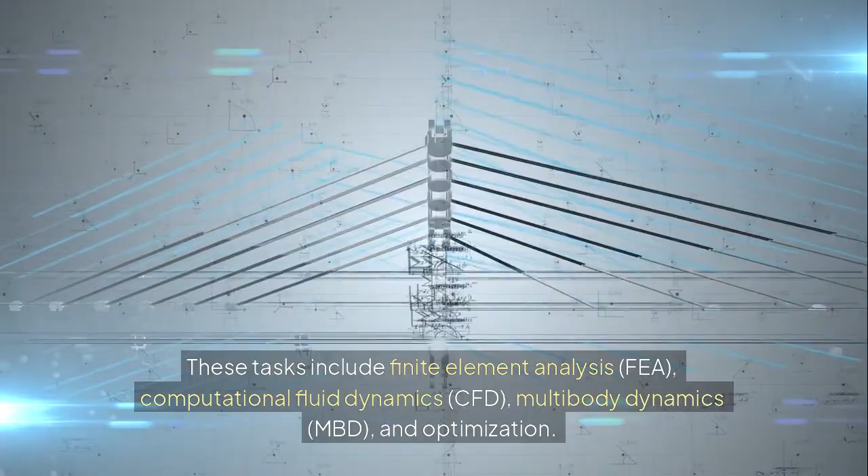Computer-aided engineering, CAE, or engineering informatics is a broad domain encompassing the use of computer software to aid in engineering analysis tasks. These tasks include finite element analysis, FEA, computational fluid dynamics, CFD, multibody dynamics, MBD, and optimization. CAE tools are integral in the engineering product development lifecycle, supporting design validation, simulation, and decision-making processes. With the advent of powerful computational resources and advanced numerical methods, CAE has evolved into a cornerstone technology in modern engineering disciplines including automotive, aerospace, civil, mechanical, and biomedical engineering.

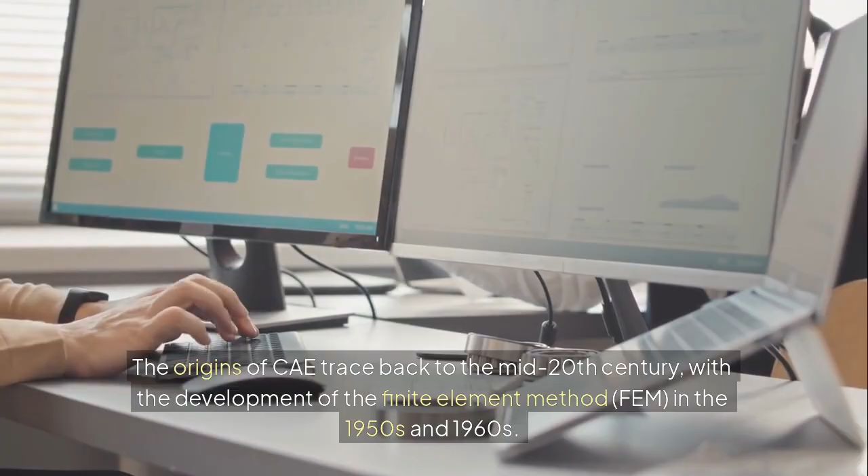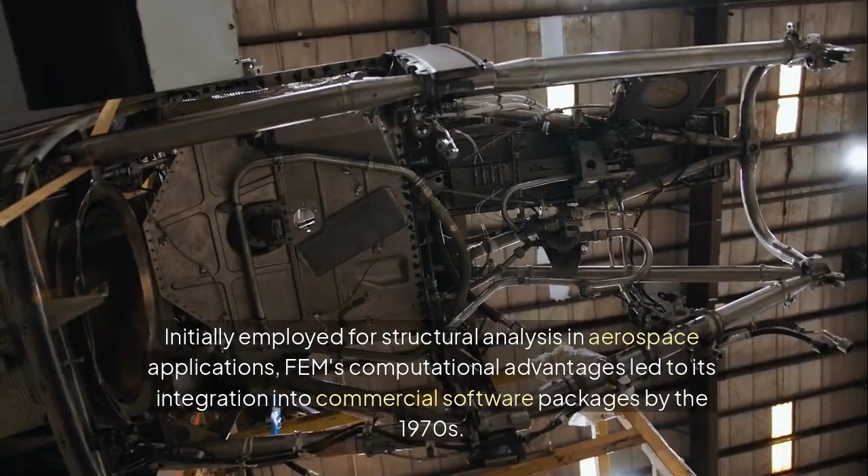Historical evolution of CAE. The origins of CAE trace back to the mid-20th century, with the development of the finite element method, FEM, in the 1950s and 1960s. Initially employed for structural analysis in aerospace applications, FEM's computational advantages led to its integration into commercial software packages by the 1970s.

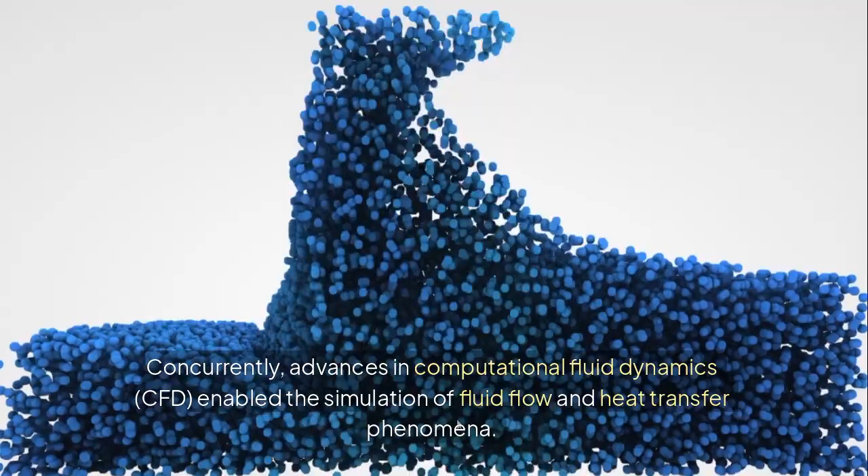Concurrently, advances in computational fluid dynamics, CFD, enabled the simulation of fluid flow and heat transfer phenomena. The 1980s and 1990s saw the proliferation of CAE tools as hardware became more affordable and software more user-friendly, culminating in integrated CAE suites that allowed for multi-physics simulations by the early 2000s.

Fundamental principles of CFD as computer-aided engineering. Computational fluid dynamics, CFD, is a critical sub-discipline within the broader field of computer-aided engineering, CAE, concerned with the numerical analysis of fluid flows and associated phenomena. Through the solution of governing partial differential equations, CFD enables engineers and scientists to simulate the behavior of fluids in complex geometries under diverse conditions.

In the context of CAE, CFD provides a virtual environment for evaluating and optimizing fluid dynamics performance, significantly reducing the need for physical prototypes and experimental testing. It plays an indispensable role in industries ranging from aerospace and automotive to biomedical and energy systems.

CFD is founded on the numerical solution of the Navier-Stokes equations, which describe the conservation of mass, momentum, and energy in a fluid medium. These equations are non-linear and coupled, often requiring sophisticated discretization and solution techniques to achieve stable and accurate results.

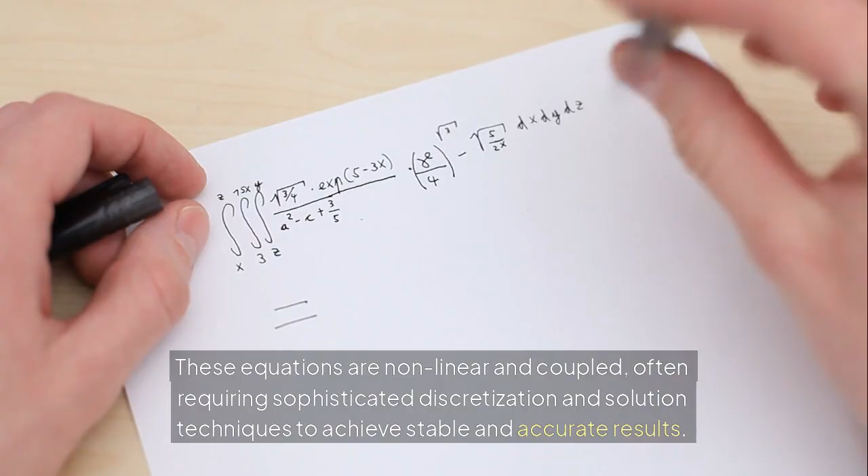The core principles include: 1. Governing equations: continuity equation for mass conservation, momentum equation from Newton's second law, and energy equation from the first law of thermodynamics.

2. Turbulence modeling: direct numerical simulation, DNS; large eddy simulation, LES; and Reynolds-averaged Navier-Stokes, RANS, models, including K-epsilon, K-omega, and SST.

3. Discretization methods: finite volume method, FVM; finite difference method, FDM; and finite element method, FEM. Each discretization method translates continuous equations into algebraic forms solvable on a computational mesh.

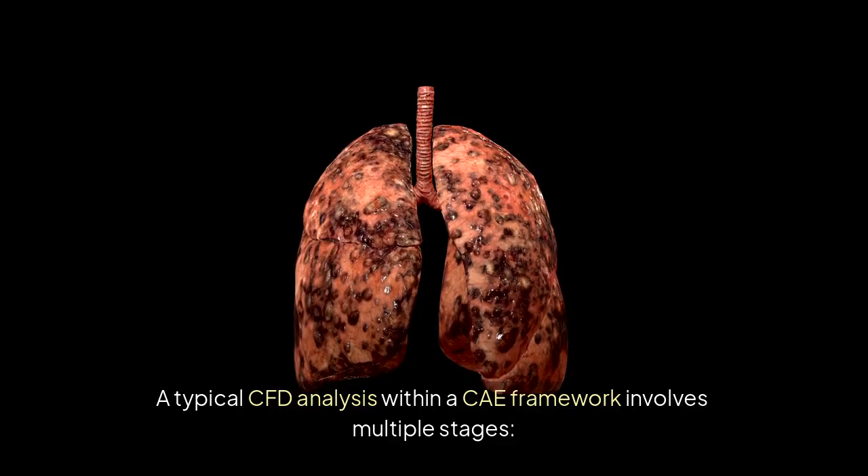The CFD workflow in CAE. A typical CFD analysis within a CAE framework involves multiple stages. 1. Pre-processing: this stage includes geometry creation or import, usually from CAD models, domain discretization, meshing, and specification of boundary and initial conditions. The quality of the mesh is paramount, as it affects both solution accuracy and computational efficiency.

2. Solver execution: during the solving phase, the discretized equations are computed iteratively using numerical solvers. Convergence criteria, under-relaxation factors, and time-stepping schemes are crucial parameters. Depending on the problem, steady-state or transient simulations may be employed.

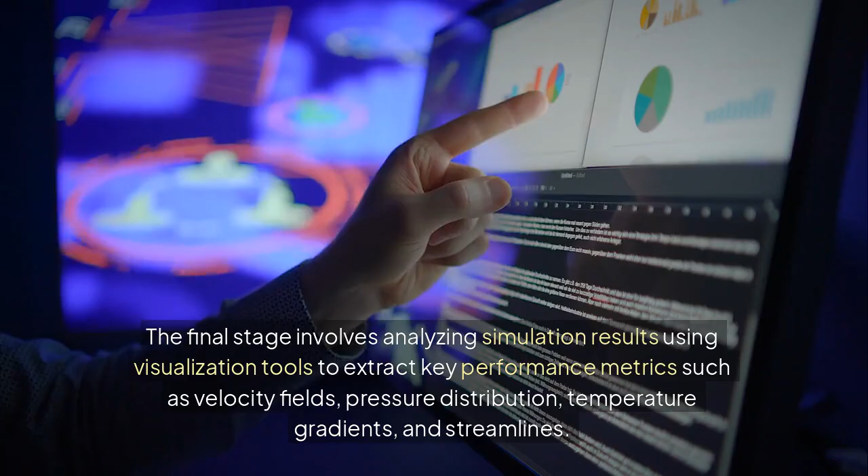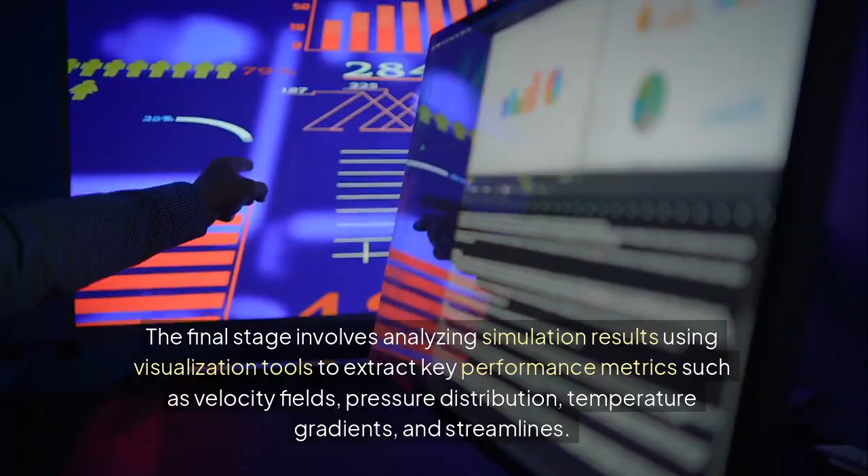3. Post-processing: the final stage involves analyzing simulation results using visualization tools to extract key performance metrics such as velocity fields, pressure distribution, temperature gradients, and streamlines. Software like ParaView, TecPlot, and ANSYS Fluent's built-in tools support advanced data analysis.

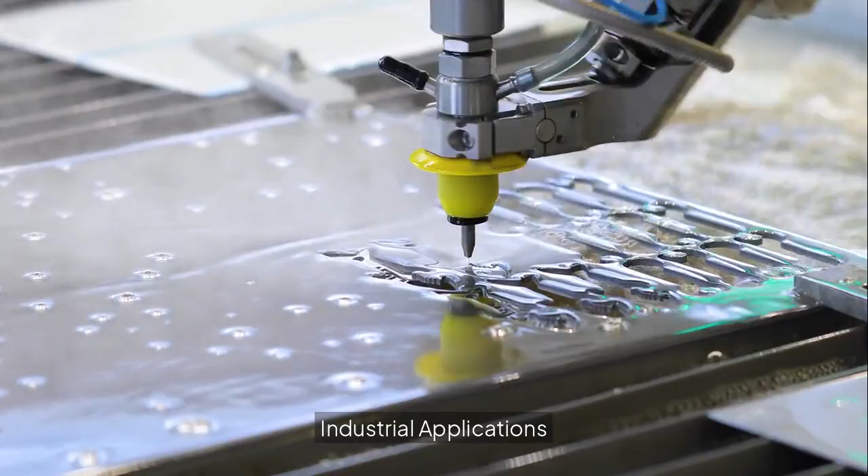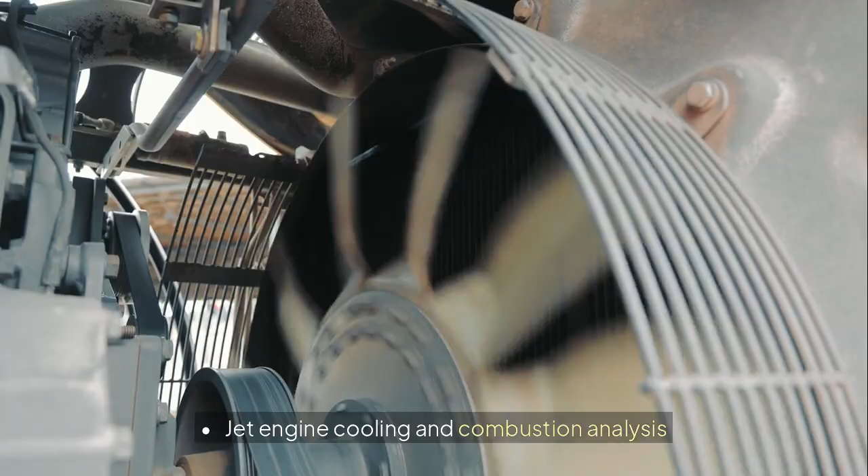Industrial applications. CFD has transformative impacts across various sectors. In aerospace engineering: airflow over aircraft wings and aerodynamics, jet engine cooling and combustion analysis, and flow-induced noise and vibration prediction.

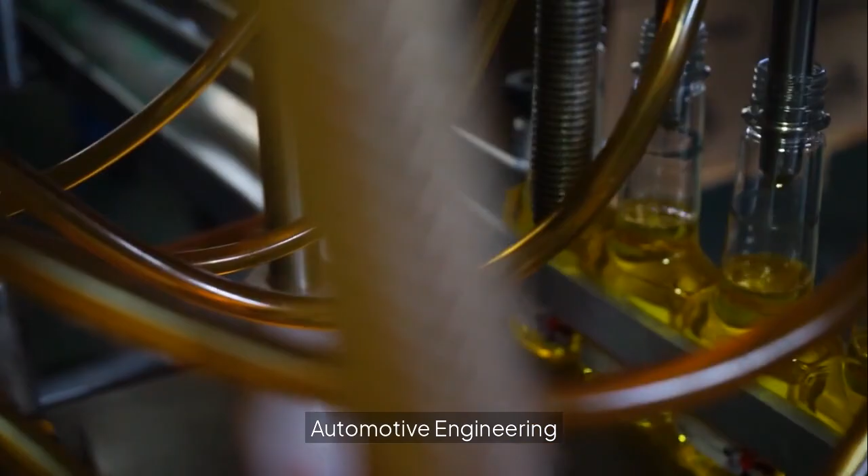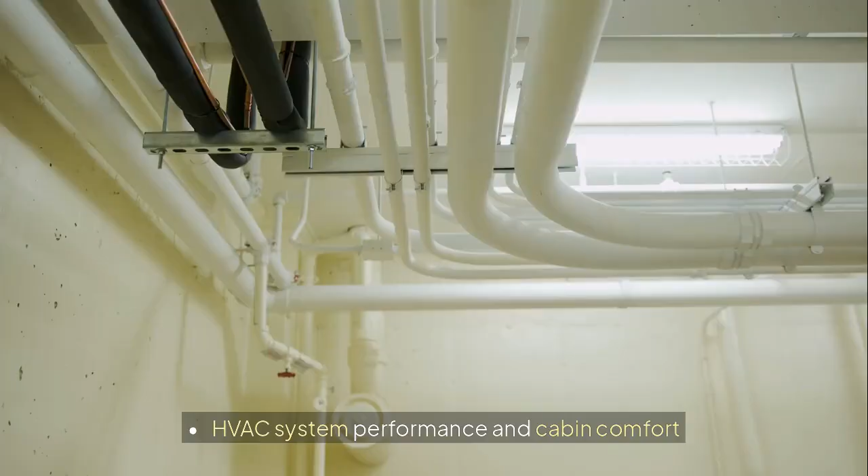Automotive engineering: external aerodynamics and drag reduction, internal combustion engine simulation, and HVAC system performance and cabin comfort.

Civil and environmental engineering: wind load analysis on structures, urban airflow modeling and pollution dispersion, and hydraulics of water distribution systems.

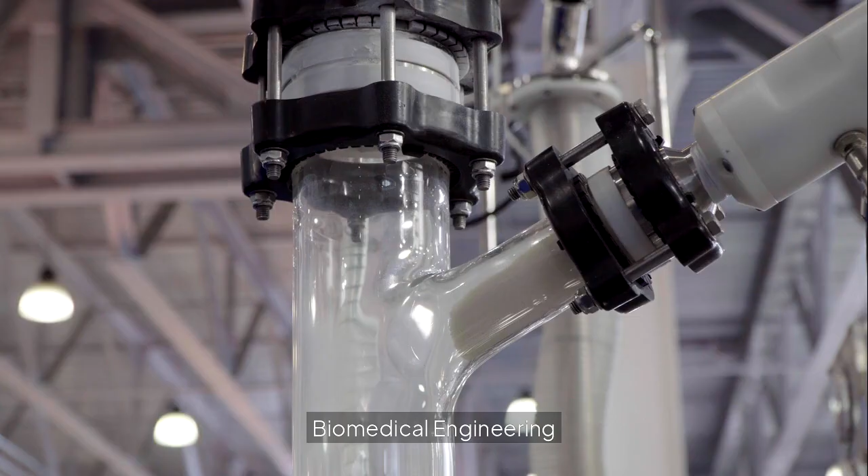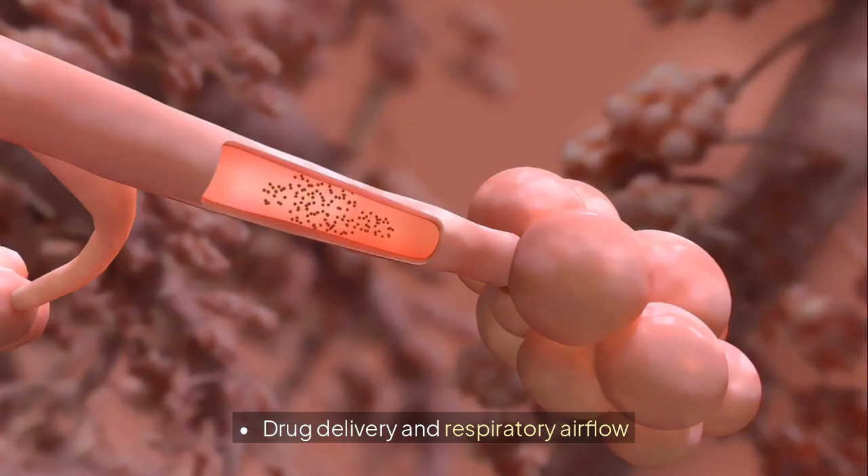Biomedical engineering: blood flow in arteries and heart valves, drug delivery and respiratory airflow, and microfluidic device simulation.

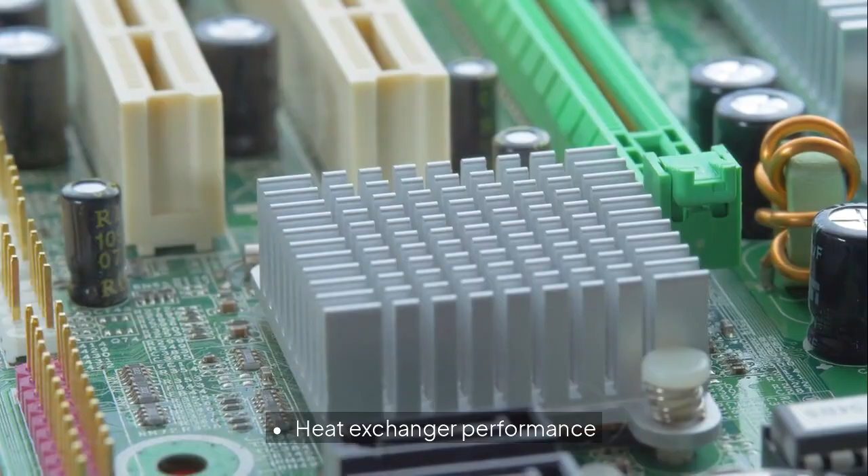Energy and power systems: combustion dynamics in gas turbines, heat exchanger performance, and renewable energy systems such as wind turbines and solar thermal collectors.

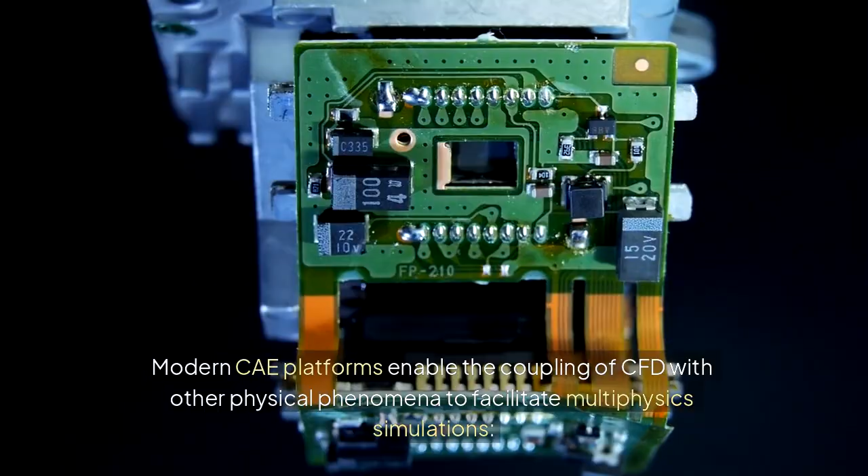Integration with multiphysics and optimization. Modern CAE platforms enable the coupling of CFD with other physical phenomena to facilitate multiphysics simulation.

CFD structural, FSI, fluid structure interaction analyses allow for the study of deformation in response to fluid forces, e.g., aeroelasticity in wings.

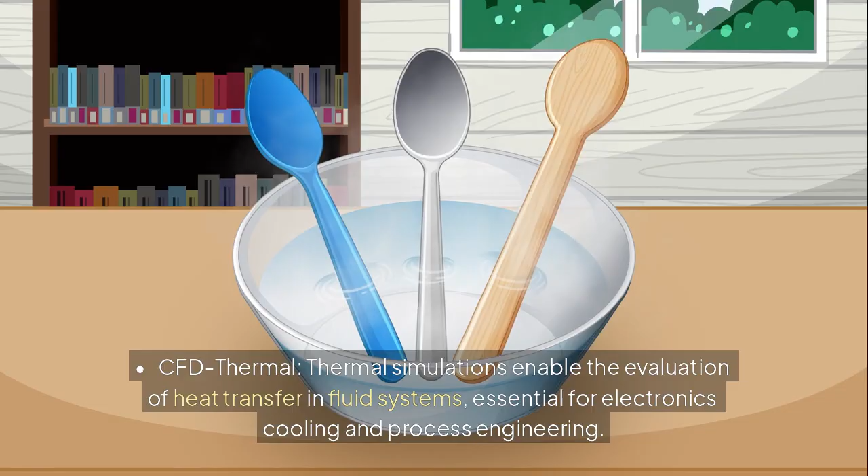CFD thermal. Thermal simulations enable the evaluation of heat transfer in fluid systems, essential for electronics cooling and process engineering.

CFD chemical reaction. Combustion and reactive flows require coupling with chemical kinetics for accurate modeling.

Additionally, optimization algorithms, e.g., genetic algorithms, adjoint methods, and gradient-based approaches, are increasingly integrated with CFD tools to automate design exploration, enhancing product performance and efficiency.

Numerical challenges and solution strategies. CFD presents several technical challenges that demand robust methodologies.

1. Turbulence modeling. The need for accurate yet computationally feasible turbulence models necessitates careful model selection based on Reynolds number and flow characteristics.

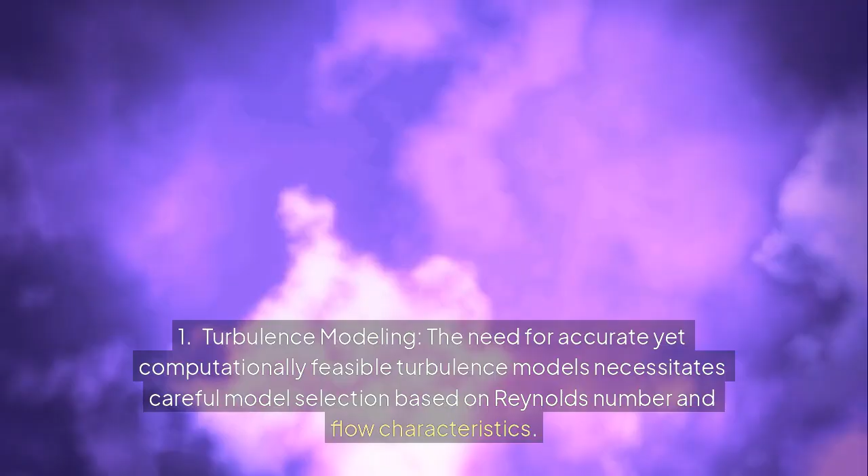2. Mesh quality and adaptivity. Structured versus unstructured meshing, boundary layer resolution, and adaptive mesh refinement, AMR, are crucial for capturing critical flow features.

3. Convergence and stability. Numerical instabilities can arise from improper discretization or boundary condition specification. Time step selection and solver settings play a vital role in ensuring convergence.

4. High-performance computing, HPC. Large-scale CFD simulations benefit from parallel computing, requiring efficient solver scaling and memory management.

Emerging trends in CFD. As computational power grows and software becomes more advanced, CFD continues to evolve in exciting directions.

1. AI and machine learning. Surrogate modeling for rapid design evaluation. Data-driven turbulence modeling. Intelligent meshing and adaptive simulation control.

2. Cloud-based simulation. Democratization of CFD tools through SaaS platforms. Scalable simulation environments for SMEs. Collaborative, real-time simulation workflows.

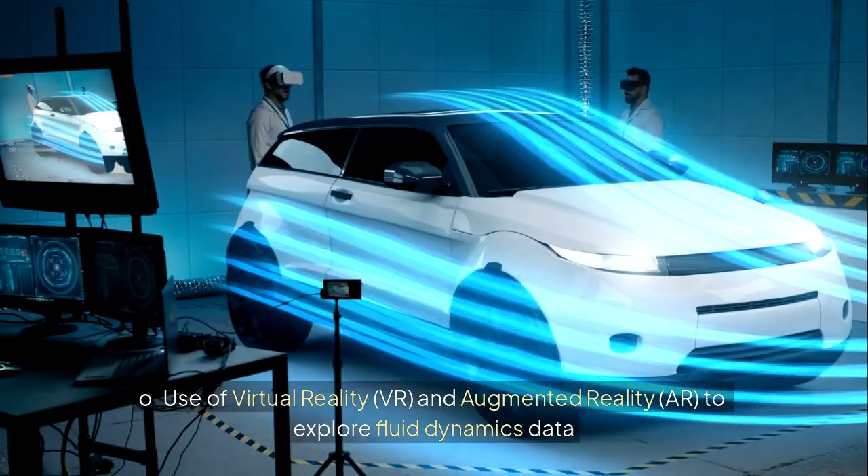4. Immersive visualization. Use of virtual reality, VR, and augmented reality, AR, to explore fluid dynamics data. Enhanced design communication and stakeholder engagement.

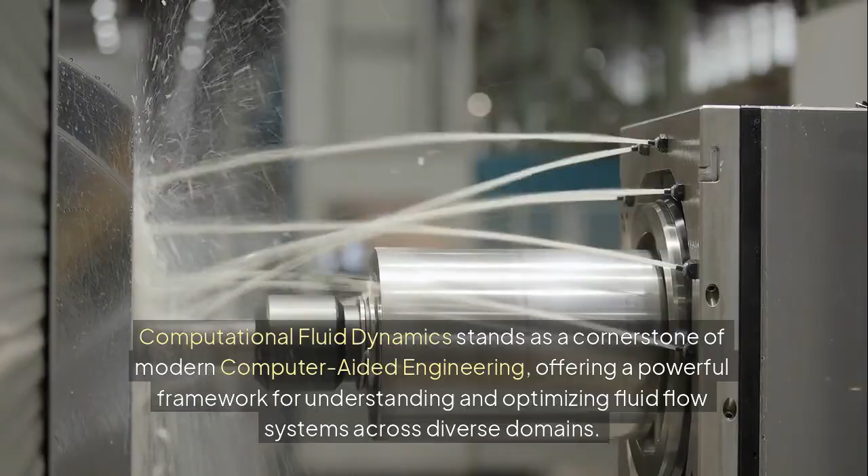Computational fluid dynamics stands as a cornerstone of modern computer-aided engineering, offering a powerful framework for understanding and optimizing fluid flow systems across diverse domains.

Through sophisticated numerical methods and integrated CAE platforms, CFD facilitates a paradigm shift from experimental to virtual testing, accelerating innovation and reducing time to market.

The continuous integration of AI, cloud computing, and real-time simulation into CFD tools promises to further expand its capabilities, making it an indispensable asset in the digital engineering toolkit.

Technological foundations of CFD as computer-aided engineering, CAE.

Computational Fluid Dynamics, CFD, is a vital field within computer-aided engineering, CAE, that focuses on the numerical simulation of fluid flow and heat transfer. By leveraging mathematical models, numerical algorithms, and high-performance computing, CFD empowers engineers to design and analyze systems where fluid motion is a key factor.

The increasing complexity of engineering systems and the demand for optimization in performance, cost, and sustainability have made CFD an indispensable tool across multiple industries. This essay provides an in-depth exploration of the technological foundations, numerical algorithms, programming paradigms, and engineering applications of CFD within the CAE domain.

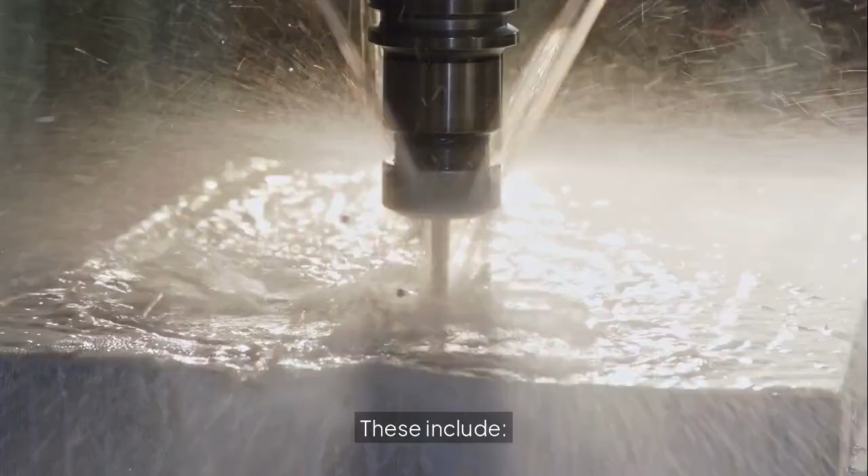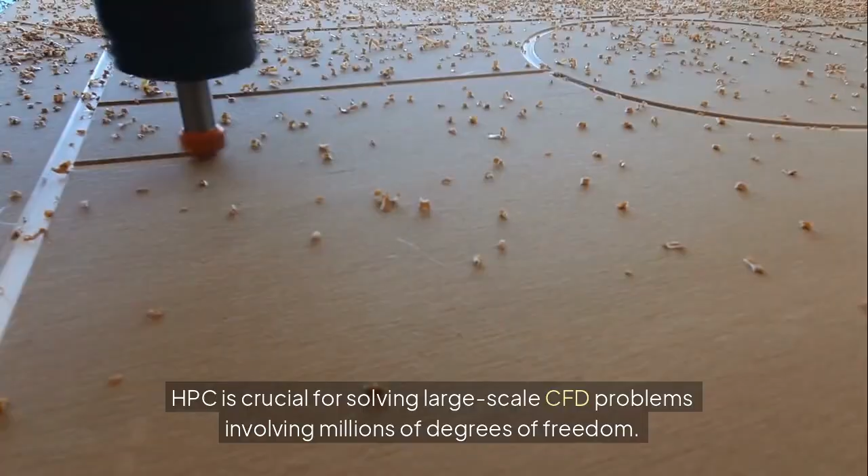High-performance computing, HPC. HPC is crucial for solving large-scale CFD problems involving millions of degrees of freedom. Parallel computing architectures, distributed memory systems, and GPU acceleration significantly enhance the computational efficiency of CFD solvers.

Mesh generation and adaptive grid. Mesh generation converts a physical geometry into a discretized computational domain. Structured, unstructured, and hybrid meshes are used depending on the complexity of the geometry and the desired resolution. Adaptive mesh refinement, AMR, techniques dynamically refine the mesh based on solution gradients, ensuring high accuracy without excessive computational cost.

Visualization and post-processing tools. Advanced visualization software, e.g., ParaView, Tecplot, FieldView, facilitates the interpretation of large CFD datasets. These tools support contour plots, vector fields, streamlines, and isosurfaces, enabling engineers to assess flow patterns, identify anomalies, and make informed decisions.

Numerical algorithms in CFD. The core of any CFD simulation is the numerical solution of the Navier-Stokes equations, which govern fluid motion. These equations are typically discretized using various algorithms.

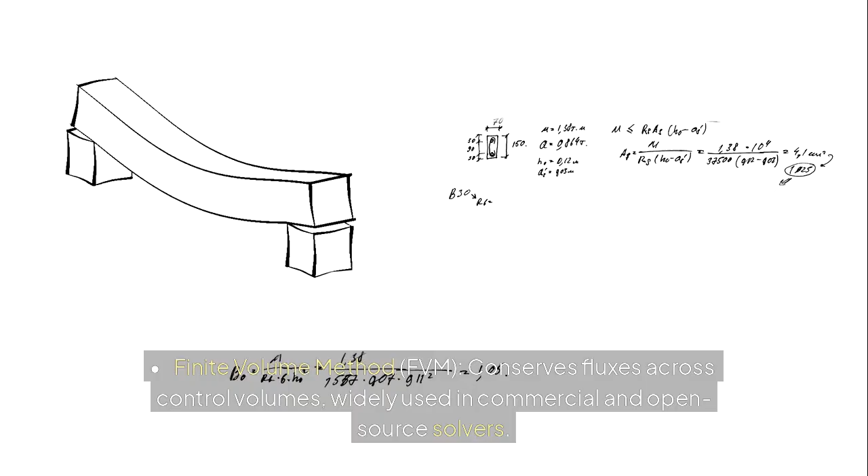Discretization techniques. Finite volume method, FVM, conserves fluxes across control volumes, widely used in commercial and open-source solvers. Finite element method, FEM, offers flexibility for complex geometries and higher-order accuracy. Finite difference method, FDM, simpler to implement, suitable for structured grids and educational use.

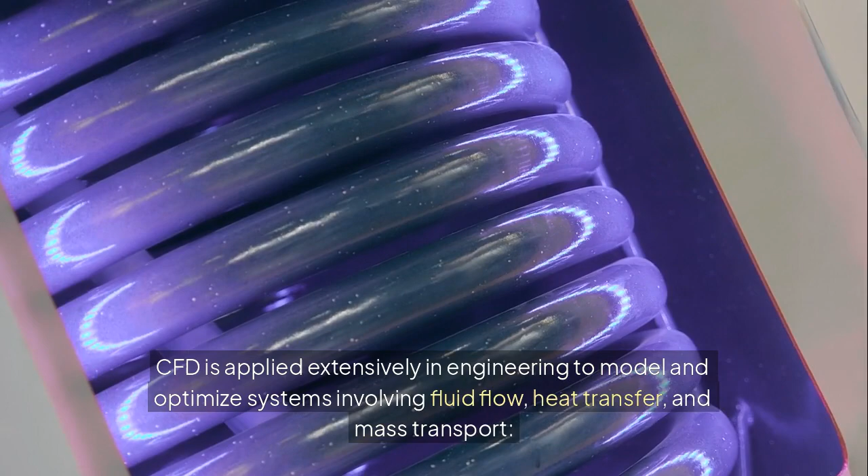Engineering applications of CFD. CFD is applied extensively in engineering to model and optimize systems involving fluid flow, heat transfer, and mass transport.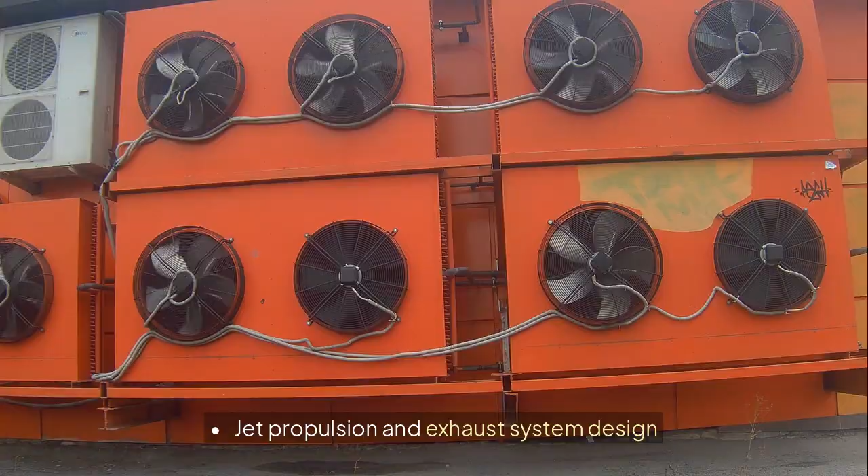Aerospace engineering: aerodynamic analysis of aircraft and spacecraft, jet propulsion and exhaust system design, and thermal control in high-speed vehicles.

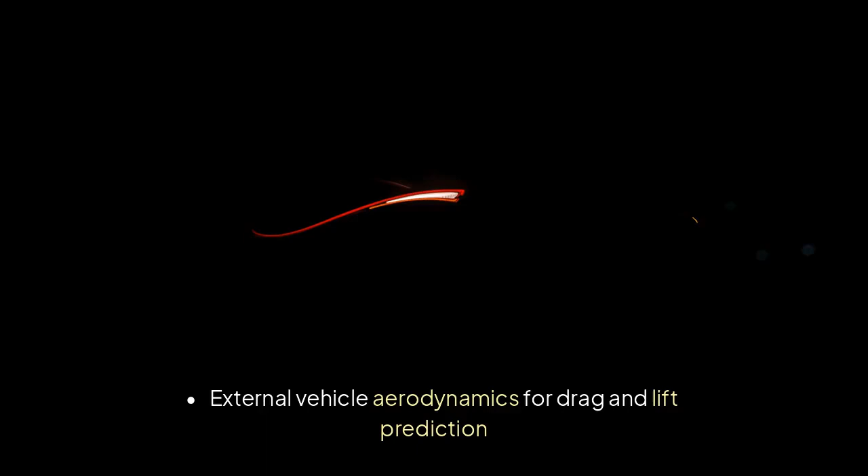Automotive engineering: external vehicle aerodynamics for drag and lift prediction, engine combustion analysis and emission reduction, and cooling system optimization for engines and batteries.

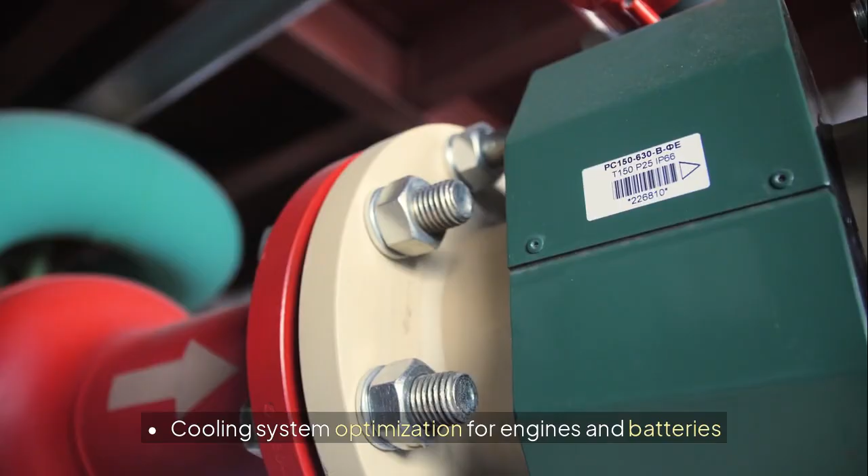Civil and structural engineering: wind flow around high-rise buildings and bridges, ventilation systems in tunnels and underground facilities, and urban air quality and pollutant dispersion studies.

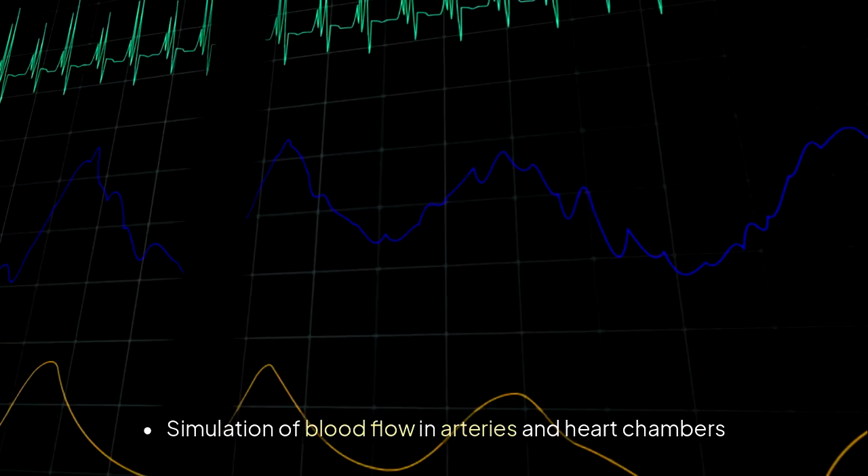Biomedical engineering: simulation of blood flow in arteries and heart chambers, airflow modeling in respiratory systems and ventilators, and design of drug delivery mechanisms using microfluidics.

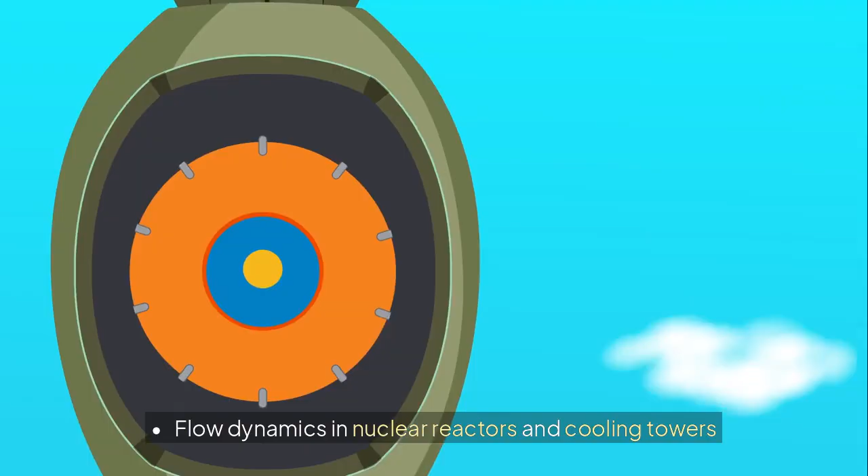Energy systems: thermal performance of heat exchangers and boilers, flow dynamics in nuclear reactors and cooling towers, and optimization of wind and hydro turbine blades.

AI and quantum technologies in CAE. The integration of artificial intelligence (AI) and quantum computing marks the next frontier in CAE advancement.

Artificial intelligence in CAE. AI enhances CAE capabilities by enabling surrogate modeling, where machine learning models approximate complex simulations for faster evaluations.

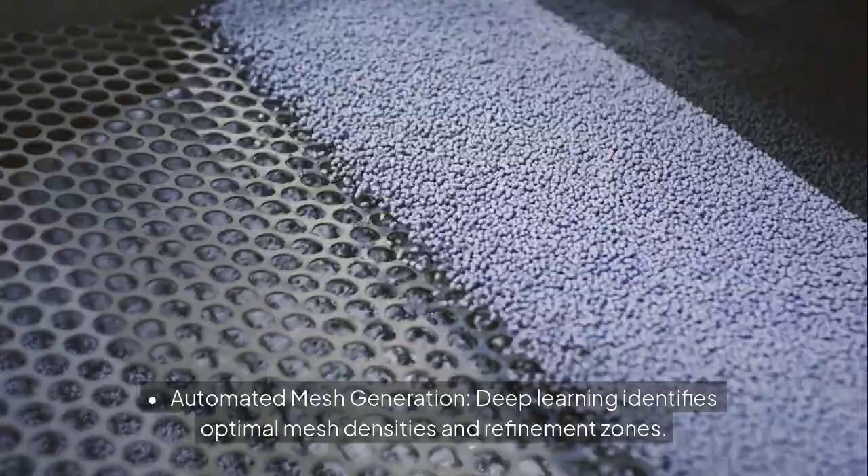Automated mesh generation: deep learning identifies optimal mesh densities and refinement zones. Predictive maintenance: trained models forecast component failure from CAE-derived stress and strain histories.

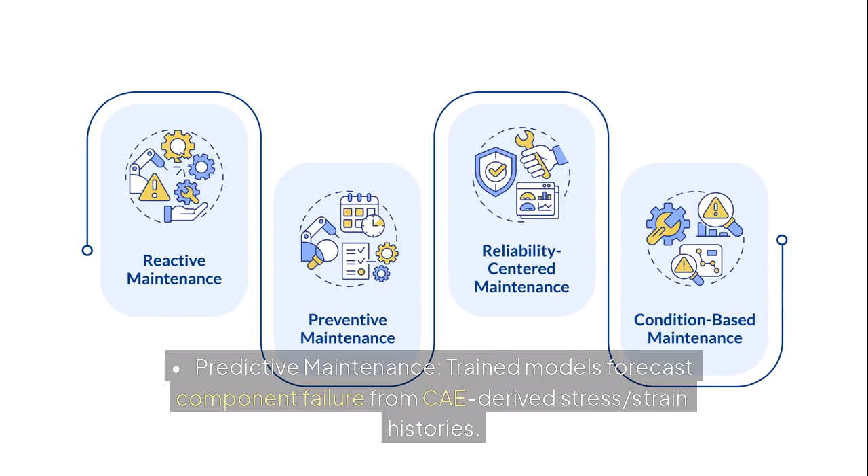Design optimization. Reinforcement learning and genetic algorithms explore vast design spaces.

Quantum computing in CAE. Quantum computing holds transformative potential for CAE through its ability to solve high-dimensional problems exponentially faster.

Quantum annealing. Applied in topology optimization and complex constraint satisfaction problems.

Quantum algorithms for solving sparse linear systems, which underpin many physics and CFD problems. Hybrid quantum-classical models combine quantum subroutines with classical solvers to reduce computation time in parameter estimation or uncertainty quantification.

While still in early stages, these technologies promise to redefine the computational boundaries of engineering simulation.

Integration with AI and machine learning in CFD. Recent advancements in artificial intelligence (AI) are augmenting traditional CFD methods.

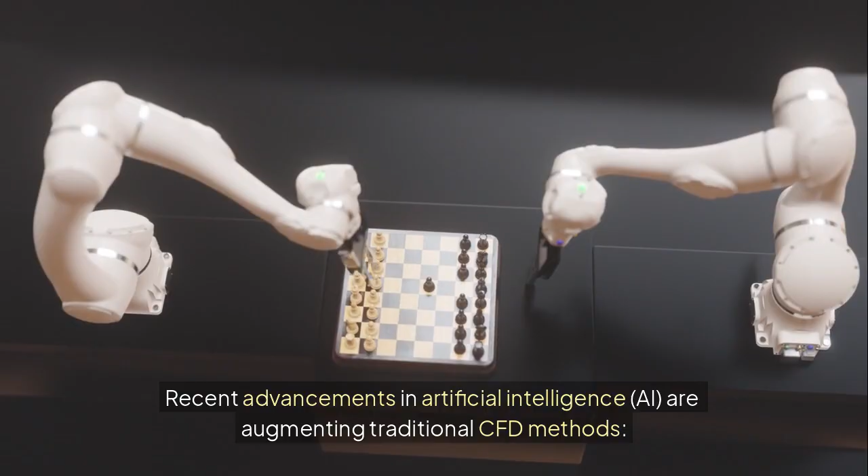Surrogate modeling: neural networks and Gaussian processes replace high-fidelity models for rapid predictions. Data-driven turbulence models: ML algorithms are trained on DNS data to improve turbulence predictions.

Smart meshing. AI algorithms assist in generating optimal mesh distributions based on past simulations.

Challenges and limitations. Despite its capabilities, CFD faces several limitations, including high computational cost for transient and multiphysics problems.

Sensitivity to boundary conditions and numerical schemes, a steep learning curve for effective software usage and interpretation of results, and validation requirements to ensure predictive accuracy.

Conclusion. Computational fluid dynamics, as a core discipline of computer-aided engineering, plays a pivotal role in simulating and optimizing

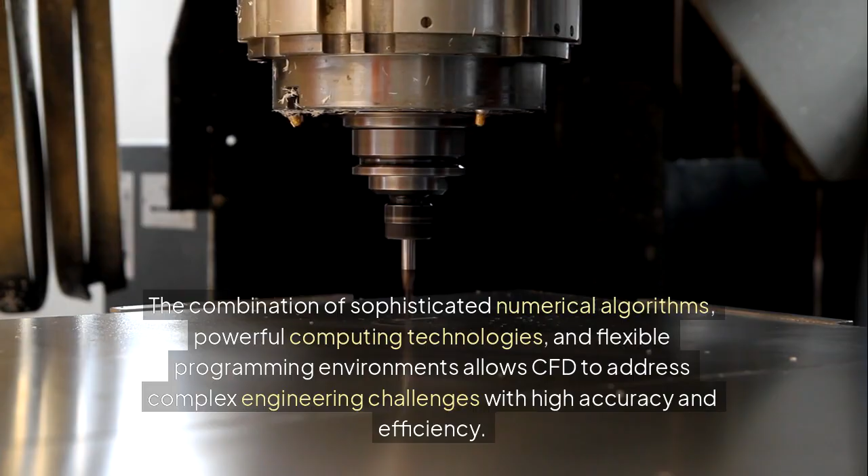fluid-based systems. The combination of sophisticated numerical algorithms, powerful computing technologies, and flexible programming environments allows CFD to address complex engineering challenges with high accuracy and efficiency.

As the integration with AI and cloud computing deepens, and as new solver techniques emerge, the future of CFD promises to be even more dynamic, accessible, and impactful in the engineering landscape.